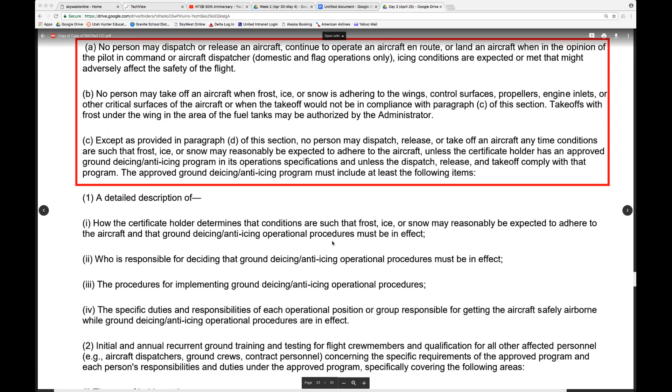So the big thing to remember from this 121.629, just as a refresher, is icing conditions. So we're not allowed to dispatch into severe, whether known or forecasted icing, right? And did he go over what icing is so you guys have an understanding of what that is when we say icing? Yes, no? He said literally any type of ice accumulations on the wing or any part of the aircraft.

Yeah, so just for an example, today I got to jump seat into Aspen, Colorado. This is one of our, we call them SAT-4 airports. And it was raining in Salt Lake today. Now, in Salt Lake, it's been off and on, bad weather, good weather, bad weather.

But what we consider icing conditions is when it's less than 10 degrees Celsius, and I'd like you guys to write this down. It's 10 degrees Celsius or less, and there's visible moisture, whether that be precipitation, mist, fog, clouds, any of that. And so today, as we were taxiing out to the runway, it was 2 degrees outside and it was raining, so we had to de-ice.

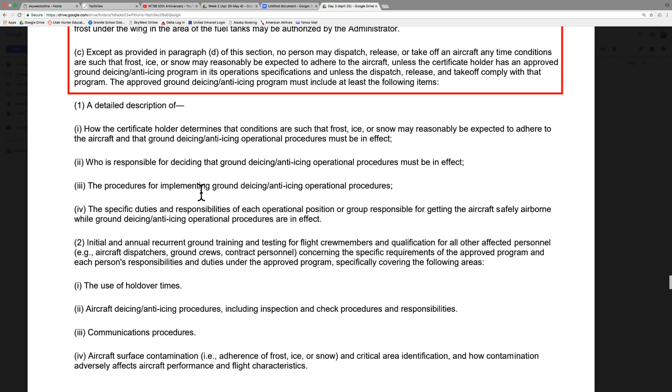So here's a description of what they're talking about here. So how the certificate holder determines that icing conditions such as frost, ice, snow may reasonably be expected to adhere to the aircraft, and that ground de-icing, anti-icing operational procedures must be in effect. Who is responsible for deciding the ground de-icing, anti-icing operational procedures must be in effect? And then the procedures. So basically, it's just saying we have to have a game plan for anti-icing or de-icing.

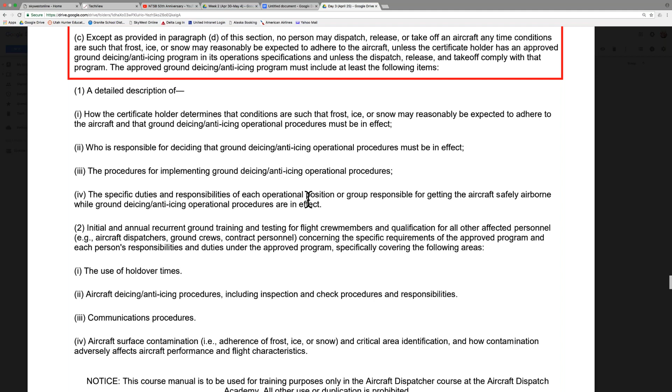So yeah, that's pretty much the gist of this detailed description. We just have to have published somewhere how we handle this. Now, when it talks about the use of holdover times here, holdover times, there's different types of anti-icing fluid. We have a type 1, type 2, type 3, and type 4, and they each have what we call a holdover time.

And what that is saying is, after the airplane has been de-iced, had that liquid sprayed on it, how long can they remain on the ground before takeoff? So if they haven't taken off within that holdover time, then they have to go through the de-icing again.

And to give you an idea of why that's important, de-ice fluid can cost anywhere from, I want to say, $22 a gallon to $50 a gallon. And you saw how quickly those machines were spraying out that de-icing fluid. It's pretty crazy how quick those charges can rack up. So we need to know our holdover times, and we need to make sure that we're staying within those times.

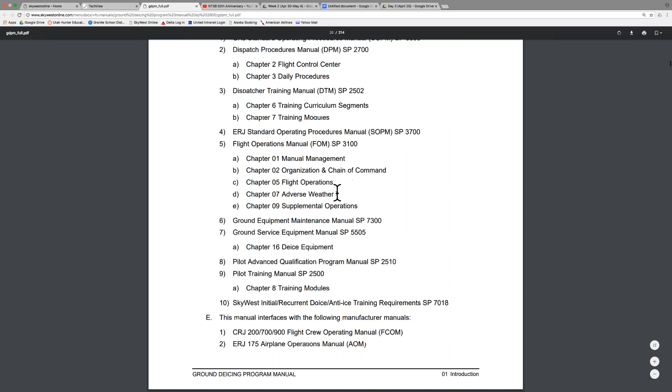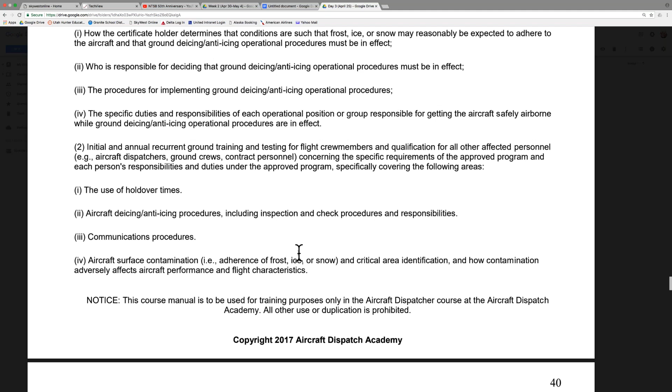So the pilots will actually reference these de-ice cards whenever they have to go through the de-icing process. And this is what I was talking about when I said pre-takeoff contamination check. That's where the first officer will actually walk back, look out both the left and right side of the aircraft, and make sure there's no snow or ice adhering to the wings, and then he'll walk back up and they'll take off.

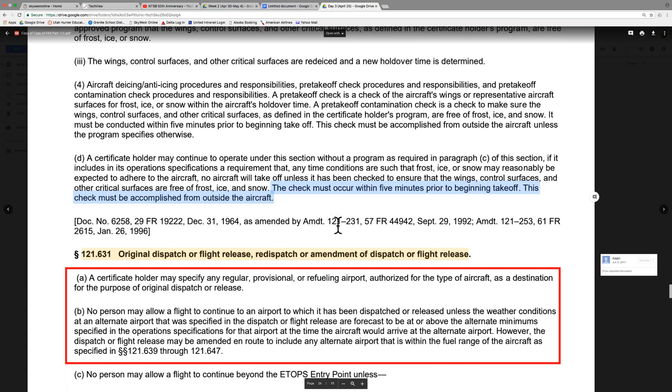And referring to that, this is why it's important that the first officer go back and check, because this FAR states that the check must occur within 5 minutes prior to beginning takeoff. So we have an exemption where they can actually look outside the windows. They don't have to walk outside of the aircraft. All right. Any questions about icing? All right, so we'll continue on.

So this is talking about our dispatch release. Now, I showed you guys what the dispatch release looks like. Just a document with a whole bunch of gibberish on it right now, but it'll start to make sense, some of the information that's contained on it. So this is talking about how the dispatch release is required to list basically any airport it's intended to land at. That's kind of basic knowledge, right? If we have a destination, we list our city pairs, like Salt Lake to Aspen, and then we'd list an alternate if we had an alternate.

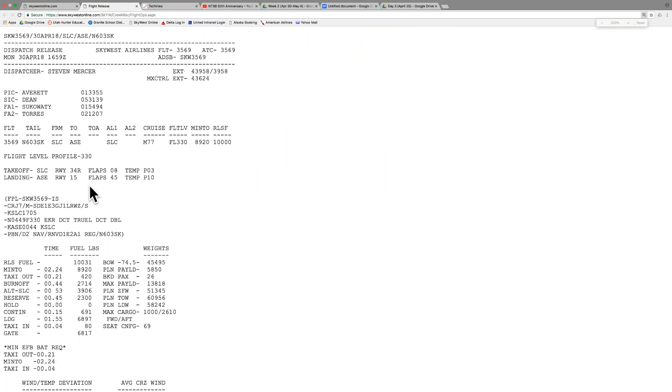I'm still not tracking. So when you say send it to him, you're just talking about send him the numbers. You're not actually sending him the fuel. Correct. We're just telling him. You're not literally sending him. Right. So on our release, let me pull up a release really quick. No, I get it. You're just changing what the actual fuel numbers are going to be, as opposed to sending him fuel. I was just confused by the word send. Yeah. So let me show you guys to help you get a visual here.

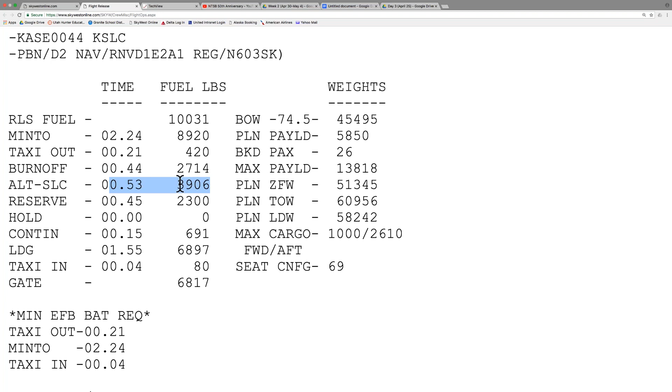So this is what he's expected to use, right? He's expected to burn 44 minutes of fuel or 2,700 pounds of fuel. So let's say that this number right here is blank. So in the event that all of a sudden he requires an alternate, and we tell him, hey, your alternate is now Salt Lake, the weather here at Aspen fell below minimums, and you need an alternate now. We would send him this information, the fuel burn in minutes and pounds that would take to get to the alternate.

We would just tell him, hey, your alternate burn back to Salt Lake is 3,906 pounds. And he would go, okay. So at that point, he could make the decision to continue on to the destination, or if it's not safe for him to continue, he'll ask for a diversion airport, and we can send him the information of how to get to another diversion airport. But typically your alternate in that scenario isn't going to be the original origin airport like it is here. So your burn to your alternate airport is probably going to be 15 to 20 minutes, so we would send him that information.

Does that make sense? We're just sending him the information so that he knows, let's say he shoots an approach. It's not safe to land. It's below minimums to the point where he can't actually land. At that point, he's going to look at his fuel and he's going to say, look, we've only got 2,000 pounds of fuel left on board, and it's going to take us 20 minutes to get to our alternate. We need to bug out and get to our alternate. Does that make sense?

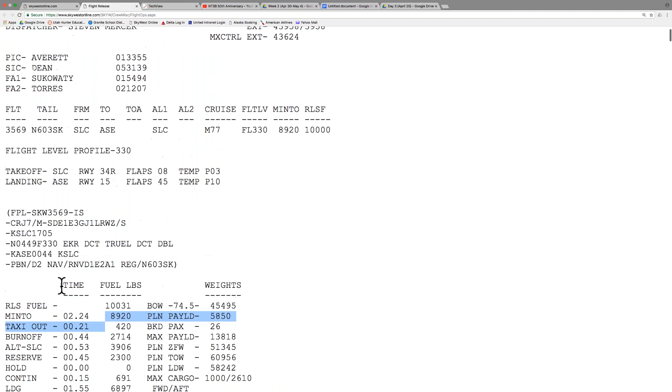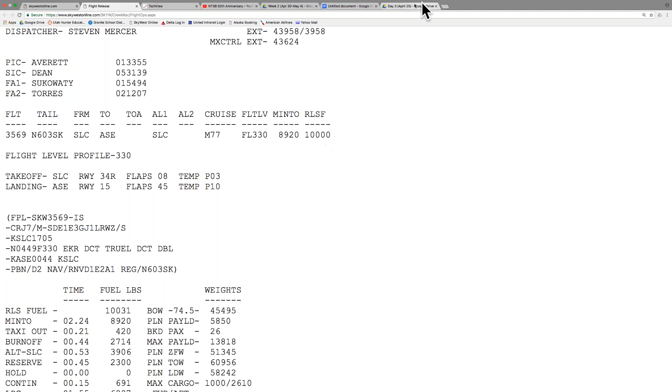Gary, is a provisional airport added into the release somewhere? Yeah, so you would actually see on the release, a provisional airport listed in this section. This is our air traffic control strip, so we would actually see an airport listed there. This is our alternate in this particular release, but then you would also see a provisional or refueling airport, it would say like fuel or something, and then it would tell us what airport we intend to land at. It's very, very rare that we ever do this. I've only actually seen it done once. But it's not completely infrequent. It has to be listed on the release, and we have to have our fuel numbers to that airport and then from that airport to the next airport.

Any other questions about that?

All right, so this is talking about unlisted or alternate airports. So when we actually do use an alternate airport, what happens is we try to get that airplane back off the ground and in the air, going to the original or intended destination as quickly as possible. We call that a diversion recovery. But there are times where an emergency is declared.

Do you guys remember how I said any airport we intend to land at has to be listed in the operation specifications, in a section we call the C70? Does everybody remember that? Yeah, so we have to actually have data and we have to be authorized to land at airports. But there are times where we have emergency landings where they have to just get down on the ground, and they'll choose any airport. This is talking about those situations.

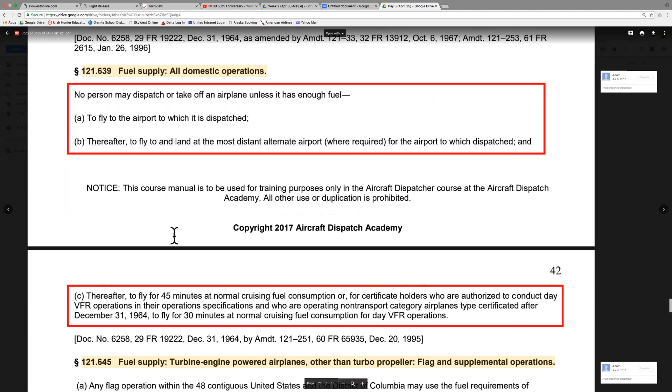So this is a very important part. When we talk about fuel supply, this is something you guys need to write down and memorize. This is one of those ones you want to memorize as close to word for word as possible.

So when you're asked, what is the required fuel supply for an aircraft? Your response needs to be: to fly to the airport to which it is dispatched, thereafter to fly and land at the most distant alternate airport for the airport to which it's dispatched, thereafter to fly for 45 minutes at normal cruising consumption. That's what you guys need to memorize, basically everything highlighted in blue here.

Does everybody have it? I'll wait for everybody to let me know they've got it.

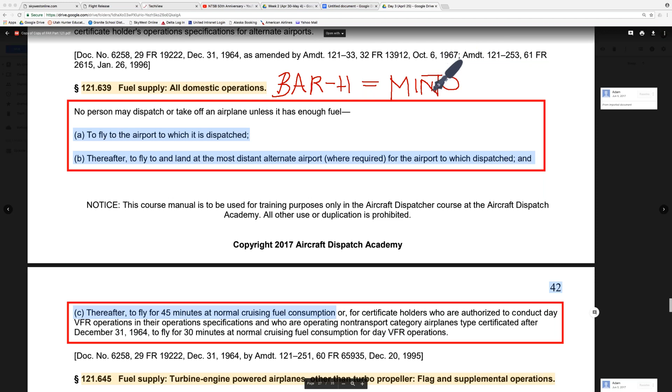Now, that being said, with the BAR-H, this equals Minto fuel. Okay, Minto fuel. Bless you. Okay, so you can see here we have Minto fuel here.

Now, what numbers comprise Minto fuel? Your burn off, your alternate, your reserve, hold, and in SkyWest, this contingency is not part of Minto. It's not required to be on board the aircraft. The captain actually can refuse this contingency fuel. But Minto is comprised of those four fuels: the burn, alternate, reserve, and hold.

And to confirm that, we can quickly add these numbers up and just make sure: 2714, 3906, 2300, 8920, and there you go.

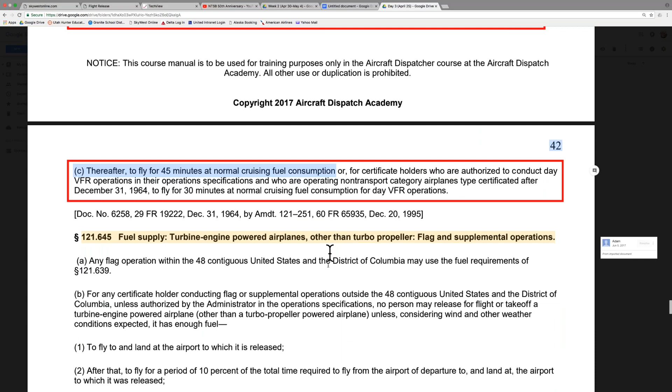Super, super, super important. So the hold refers to - and we're going to get into that down here when we talk about the factors for computing fuel.

But hold fuel is when we anticipate traffic delays or weather-related delays at the destination airport. So let's say that each airport has what we call an arrival demand chart, and it tells us how many airplanes air traffic control can physically land at the airport before they're at capacity. So as many as they can get in as quickly as they can while maintaining all the spacing requirements and all the safety requirements.

So let's say that they are 30 planes over that arrival demand. There's 30 more planes than they can physically take at the airport. In that case, we would add hold fuel because we expect air traffic control to put them in what we call a holding pattern.

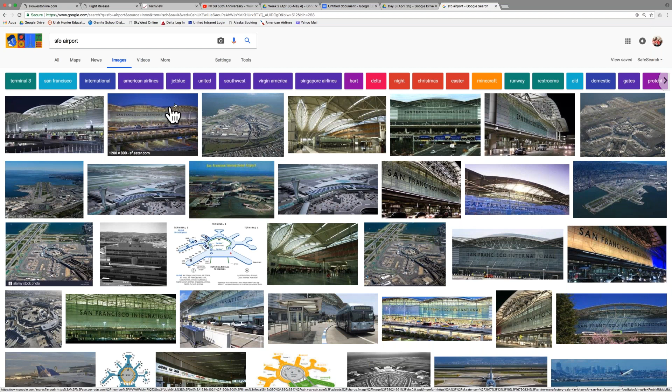I like how you mentioned San Francisco - I was just at San Francisco Airport this last weekend. Now let's see. Have very many of you ever flown into San Francisco or seen San Francisco Airport? Yes. So San Mateo is down here to the south, this is looking south. But let's see, we'll zoom in here as much as we can.

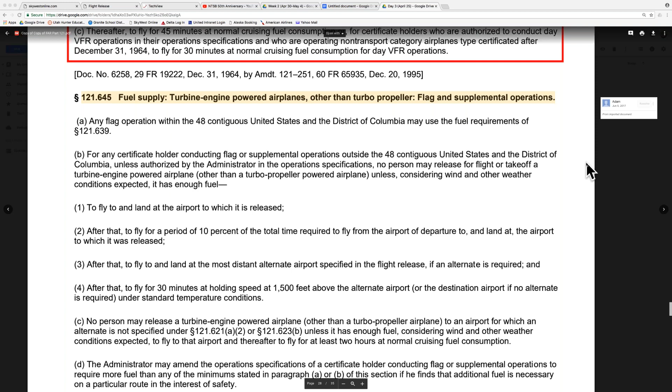So, this next section, we talk about flag operations here. This one's really confusing. Like I said, we don't tend to operate flag operations, so I'm just going to run through this really quick. There's just slight differences in the way they require fuel.

So once again, we're going to require fuel to land at the airport to which it's released. So land at the destination. After that, we're going to add 10% of the total time required to fly to the destination. So we're going to take the burn, multiply it by 10%, and then after that, we're going to add the fuel required to go to the furthest alternate, and then 30 minutes rather than 45, and rather than being at normal cruise, we're going to hold 1,500 feet above the alternate airport.

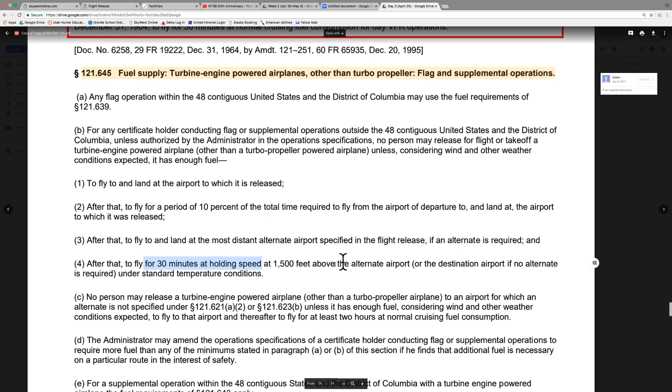So that's the big difference. It's burn times 10%, then to the alternate, and 30 minutes of holding at 1,500 feet above the alternate airport. So this one, you guys don't really need to memorize. I doubt you'll ever get asked this question in an interview or even on the practical. I know you won't get asked on the practical, but it is in the ADX.

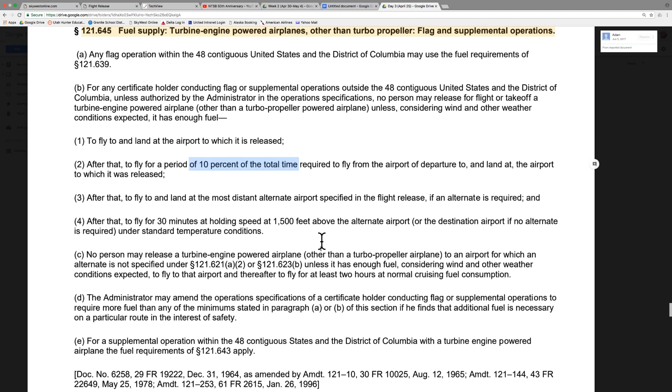But yeah, just remember flag operations. The key to remember is the 10% on top of your burn, and then 30 minutes rather than 45. So those are the two big takeaways that I think they ever ask any questions about.

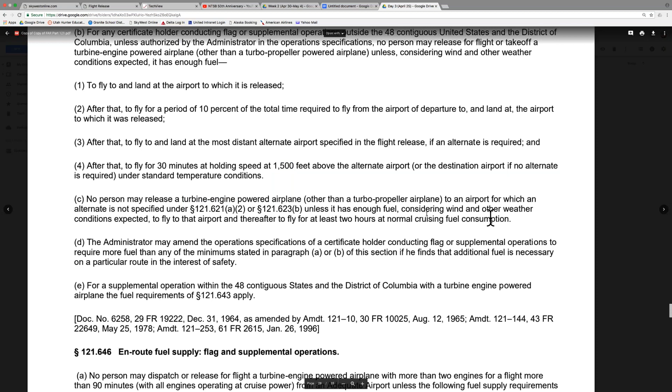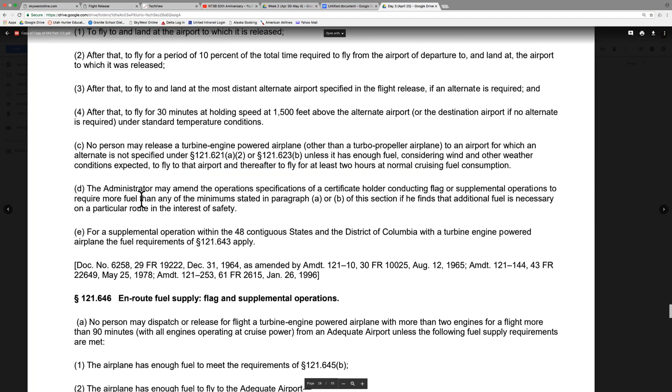Now, if it was a turbine engine, which we don't fly anymore, it would be to fly to the airport and then thereafter fly 2 hours at normal cruising fuel consumption. So again, nothing we need to worry about. And that's pretty much it.

This is talking about en route fuel supply for flag and supplemental. Again, nothing to really write down or take note of, but no person may dispatch or release a flight for a turbine-powered airplane with more than 2 engines for a flight more than 90 minutes from an adequate airport unless the following fuel supply requirements are met.

The airplane has enough fuel to meet the requirements. Duh. The airplane has enough fuel to fly to the adequate airport, assuming that there's rapid decompression at the most critical point. So basically at the top of climb, really.

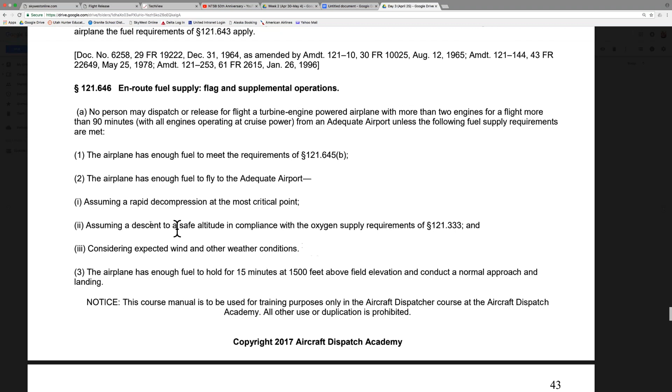And this is all assuming that there's a descent to a safe altitude with compliance to the oxygen supply requirements and considering expected wind and other conditions. So once again, not a whole lot that we need to relieve and take from this paragraph, if anything at all.

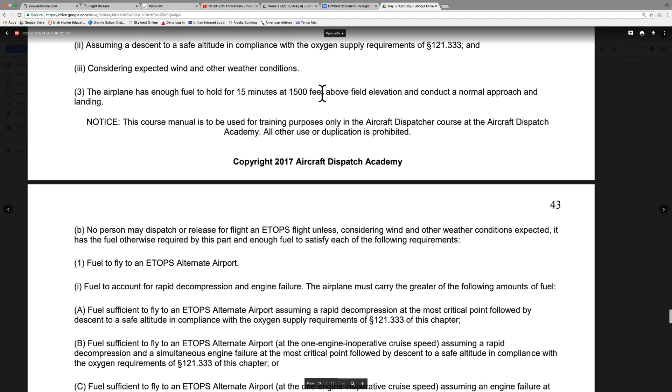The other requirement is that we have enough to hold for 15 minutes at 1,500 feet above the elevation and conduct a normal approach and landing. Then going through ETOPS, we're just not even going to waste time on any of that.

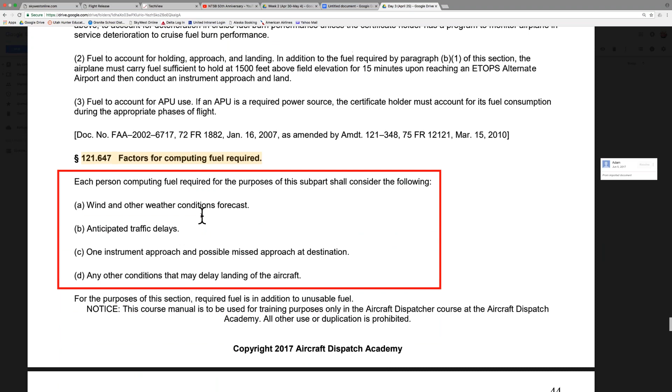Now, this is just something that's kind of standard across the board. Fuel to account for APUs. If an APU is a required power source, the certificate holder must account for its fuel consumption during the appropriate phases of flight. So an APU is an auxiliary power unit. You have two main power units. We call those integrated drive generators, or IDGs. And if one of those fails, then we have to run the auxiliary power unit, or the APU, in place of the secondary generator.

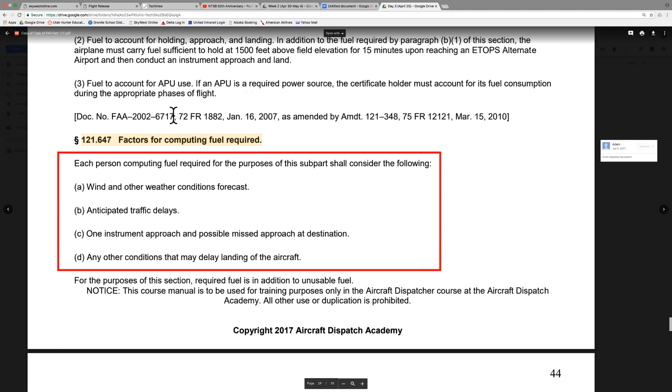When that happens, the fuel that's required to run the APU, we have to account for in the burn. So nothing to really take note of right now with that, but that's just kind of a statement that will come into play at a later time for our fuel planning, and we'll actually tell you how much fuel that is.

So this next section, though, is another one that has to be memorized, and I've got another acronym for you guys to help you memorize it. So each person computing fuel. So this is how we figure out how much fuel to put on the airplane. I mean, we know that we have to have burn off, alternate, and reserve. But how much do we know to compute for the reserve or the hold or those other types of fuel?

So when we're computing our fuel, we're going to consider these four following things: wind and other weather conditions forecast, anticipated traffic delays, one instrument approach and possible missed approach at the destination, and then any other condition that may delay the landing of the aircraft.

So, us dispatchers love to hear pilots call in and cry. So the way we remember this one is they always call in to cry about fuel. So this is how we remember our factors for computing fuel. The W, so it's WAH. Wind and other weather, anticipated traffic delays, an instrument approach and possible missed approach, and then any other conditions that may delay the landing of the aircraft.

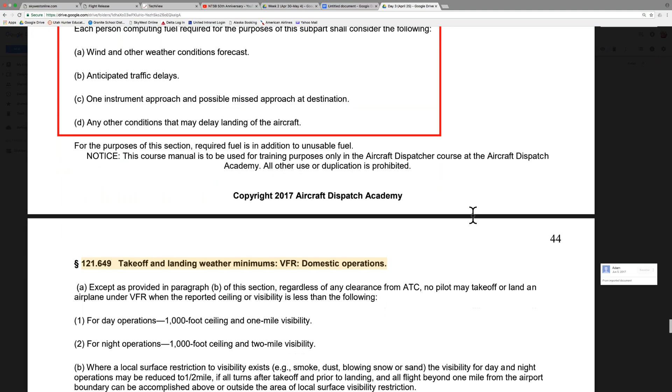So I've talked a lot about landing minimums, weather landing minimums. This is talking about VFR. So this is something that doesn't necessarily apply to us, and it's nothing that we base our minimums off of. But this is telling us that no pilot may take off or land an airplane under VFR when the reported ceiling or visibility are less than the following. So for day operations, 1,000 foot ceiling, 1 mile visibility, and for night, we just double the visibility to 2 miles.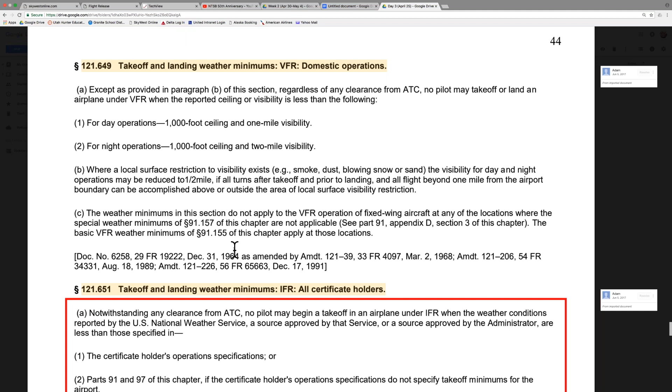Now this includes things like smoke, dust, blowing sand. And in those cases, we reduce our visibility to 1/2 mile. VFR, we don't really apply to VFR. We always plan for IFR. But that's just kind of a gee golly for you guys.

Now, this is talking about IFR, but this is just talking about the standard, for anybody out there that has a 121. Now, remember, we can have what we call exemptions in our operations specifications that allow us to operate outside these restrictions.

But this just says, notwithstanding any clearance from air traffic control, no pilot may begin a takeoff in an airplane under IFR when the weather conditions reported by the NWS or a source approved by that service or a source approved by the administrator are less than those specified in the certificate holder's operations specifications or parts 91 and 97.

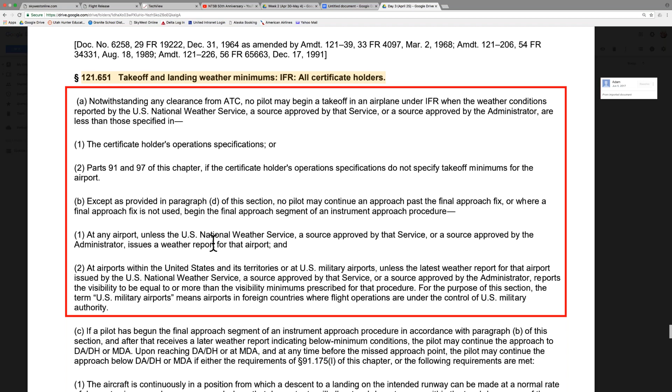If the certificate holder's operations specifications do not specify takeoff minimums for the airport, or except as provided in paragraph D of this section, no pilot may continue an approach past the final approach fix, or where a final approach fix is not used, begin the final approach segment of an instrument approach procedure. So, what in the crap does that mean? Let's see. Let's take a look at one of these so-called charts.

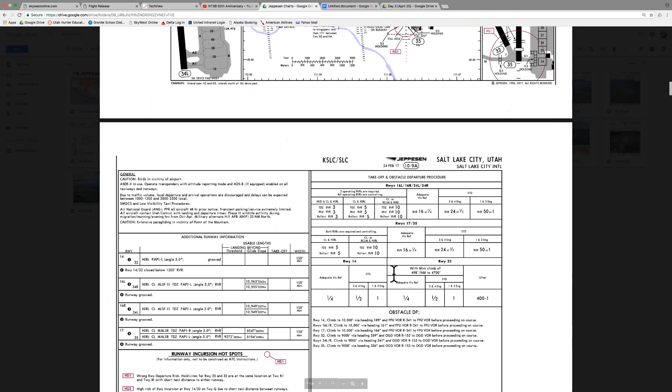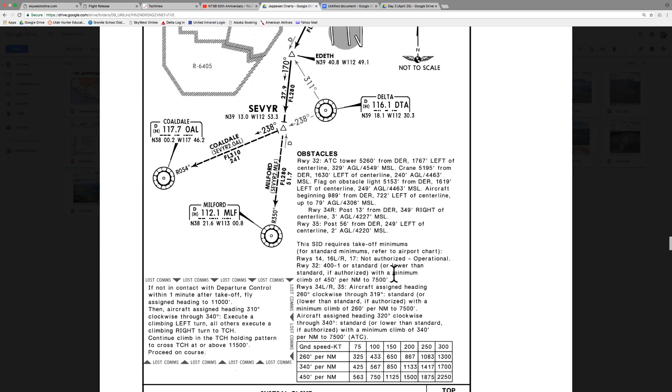So let's look at Salt Lake City here. Now, we call these JEP charts, and we'll get into the nitty-gritty about these. But it's talking about weather minimums. Each approach has weather minimums. Now in VFR we talked about ceiling and visibility. Well, in IFR we also will apply those ceilings and visibilities, but our ceilings and visibilities go down much lower than they do for VFR. Remember, VFR stands for Visual Flight Rules. And IFR stands for Instrument Flight Rules.

So what this FAR is talking about is we have what we call landing minimums right here. This is saying that the cloud layer, now who remembers what a ceiling is? Who can tell me what a ceiling is? Basically, the bottom of the clouds above the ground. Okay. More specifically, though, it's the lowest layer defined as broken or overcast clouds or vertical visibility. And that's a definition we went over a while ago, but yeah, the bottom of the clouds, so that lowest layer, the bottom of those clouds, can be 200 feet off the ground. So the pilot has to break through those clouds 200 feet above the end of the runway.

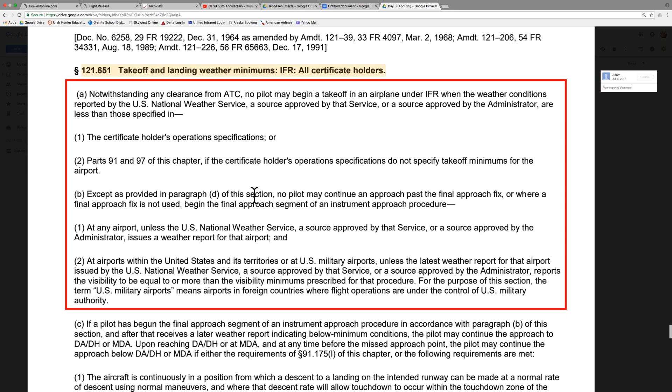It seems to me, Garrett, that as I was studying through the Sheppard Air preparation, that there are certain questions on the ADX that said if a pilot has less than 100 hours in an aircraft, that those minimums are increased. Yeah, exactly. So I don't know if Adam covered that part. Let me take a quick look over my notes to see if that's something that we cover here in the next couple seconds. Okay, yeah, we'll cover that here in just 1 second. It's actually the next section here. But yeah, we'll hit that in just 1 second.

So basically, this just tells us the weather sources that are approved for use for those minimums. So we'd have to use either the NWS or a source approved by the FAA. Like I've mentioned before, we use WSI at SkyWest, but we'd have to use one of those sources, and we can use the least penalizing source too.

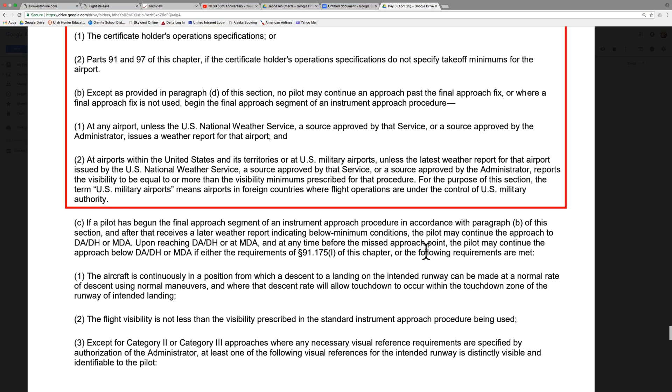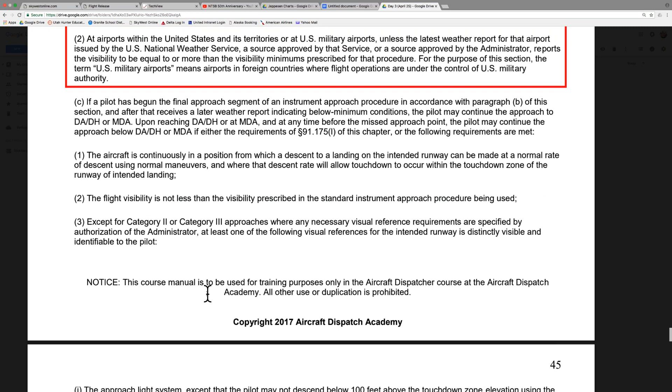Let's say the NWS is reporting 1 mile visibility, but WSI is reporting half-mile visibility. We can use the less restrictive of the two. So we could use the 1 mile in that instance to tell the pilot that he has landing minimums. The important thing to know is that what the pilot actually has reported to him as he's starting that approach, that's the information he has to go off of.

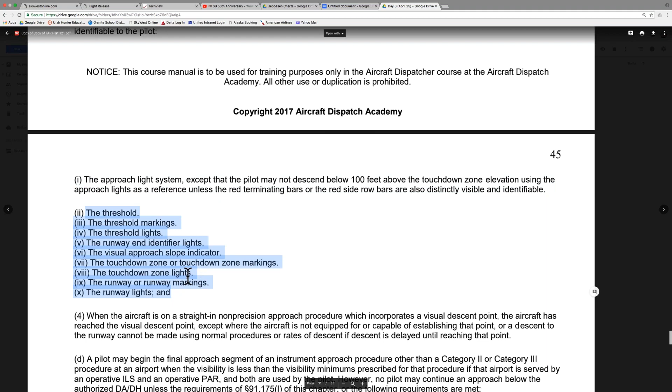So the approach light system is what he has to see. And this is a list of things that are acceptable as the lighting that he can see. So if he can see any of this lighting, then he can continue his approach to the runway when he breaks out over the touchdown zone.

We'll talk about Category 2 landings a little bit later. I don't want to confuse you guys right now, but basically there's lower minimums we can use, but in this class we will only use Cat 1 minimums, which would be that 200-1/2 here for that approach.

Okay, now let's jump into what Rex was just talking about, what we call a high minimums captain. So if the pilot in command of an airplane has not served 100 hours as pilot in command in operations under this part and the type of airplane he is operating, the minimum descent altitude or decision altitude/decision height and visibility landing minimums in the certificate holder's operation specifications for regular, provisional, or refueling airports are increased by 100 feet and 1/2 mile. So that's it. That's all I want you guys to take away from this.

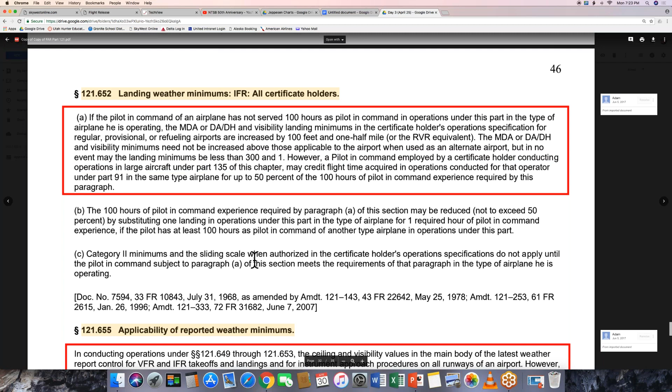Is everybody good with that? That's pretty much all that we need to take away from this. 100-1/2, 300-1. All right. And that's something that you can apply to the ADX when you take it as well. Just any question that deals with the high minimums captain, just know that you have to add 100 and 1/2 and that their minimums can never be lower than 300 and 1.

All right. In conducting operations, the ceiling and visibility values in the main body of the latest weather report control for VFR and IFR takeoffs and landings, and for instrument approach procedures, on all runways of an airport.

However, if the latest report, including an oral report from the control tower, contains visibility values specified as runway visibility or runway visual range for a particular runway of an airport, that specified value controls VFR and IFR landings and takeoffs and straight in instrument approaches for that runway.

So all this is saying is that we have to have the ceiling and visibility values in the main body of the latest weather report. And we'll talk more about this when we talk about that legal to go, like those little worksheets that I have in there. But yeah, so this is just telling us that our latest weather report is the controlling report, whether it's a textual report or from the control tower. That's the one that's controlling.

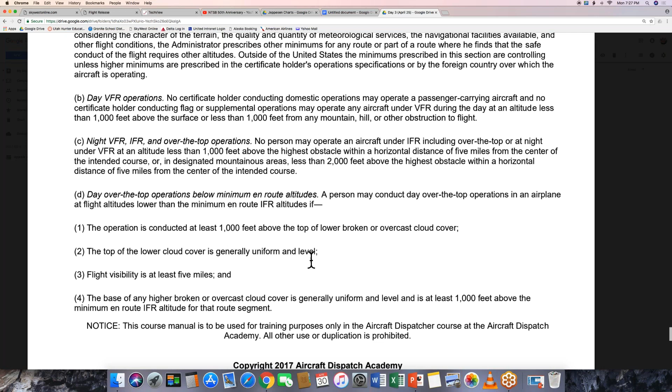And as dispatchers, we don't plan for clouds. The only clouds that we plan for are broken and overcast or vertical visibility above the airport that we intend to land at. That's all we care about when it comes to clouds. Anything en route, we just don't care about as a dispatcher because that's the pilot's job. And we don't know where every cloud's going to be in the sky.

So, responsibility for dispatch release. Each certificate holder conducting domestic or flag operations shall prepare a dispatch release for each flight between specified points based on information furnished by an authorized aircraft dispatcher. The pilot in command and authorized aircraft dispatcher shall sign the release only if they believe that the flight may or can be made with safety.

The aircraft dispatcher may delegate authority to sign the release for a particular flight, but he may not delegate his authority to dispatch. So what this is talking about is everything's done electronically, and we do electronic signatures now, but there's times when the system may go down or we may have issues getting them a particular release. Now, in the event that that happens, we can still have the pilot sign the release on our behalf,

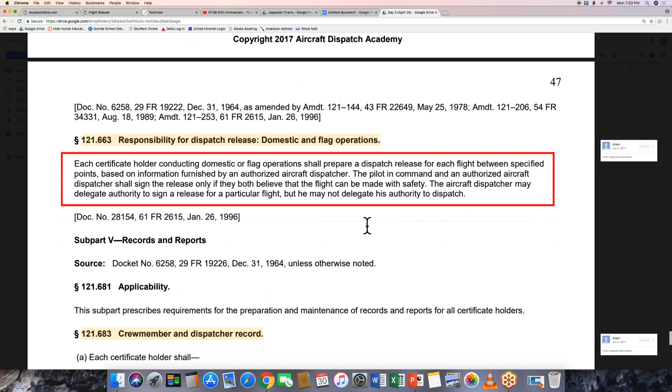Adam, if you're there, you can chime in. In reading 121.663, it does say that the pilot in command and an authorized aircraft dispatcher shall sign. So it doesn't say anybody else there. And I'm pretty sure that's what it is, the pilot in command, because he's the one that's basically backing up our decision to execute the flight. And you did say that if it's recorded verbally, he can sign.

Yeah. So Adam, we're talking about this responsibility for the dispatch release. We're talking about the authority to sign, delegating the authority to sign. Is it only the PIC? I'm pretty sure it's only the PIC that's allowed to sign in that instance. Is that correct?

He doesn't have a mic right now, sorry.

There you go. Yeah, so the PIC has to actually sign it. The dispatcher can delegate his authority to sign it to the PIC. So there you go.

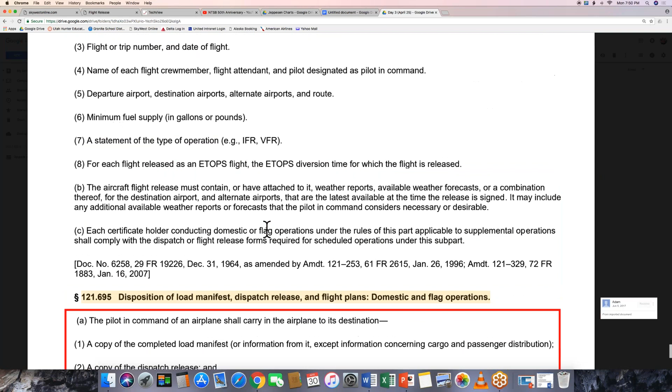All right. Now, this is talking about a flight release. So, like I told you guys before, a flight release is basically a dispatch release, but for supplemental operations. And this is something that we will assist the pilots with at SkyWest, but not required by the dispatcher. This is something that technically the pilot is responsible for as a flight release. But it's very similar to dispatch release. But I'm not going to confuse you guys. It's not necessary to know this part, so I'm not going to confuse it with what we just learned. But there are slight differences.

This is talking about what the pilot has to have aboard the aircraft when flying to the destination. In the event that an FAA examiner is aboard the aircraft, or decides to come aboard at any point, these are the things the pilot has to have in his possession. So what you guys need to memorize is the three things a pilot has to have to the destination: the load manifest, the dispatch release, and a copy of the flight plan.

Those are the three things. I don't have any fun acronyms for this. Maybe DLC - dispatch, I don't know if anybody's a gamer. DLC: dispatch release, load manifest, and copy of the flight plan. Maybe that's how I'll remember it. That's my acronym for it. I just created that on the spot, never used it before.

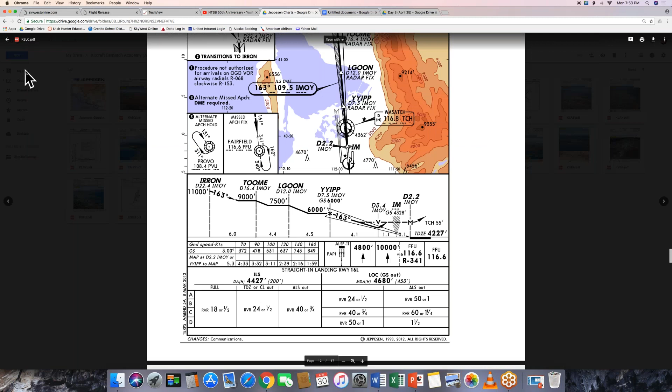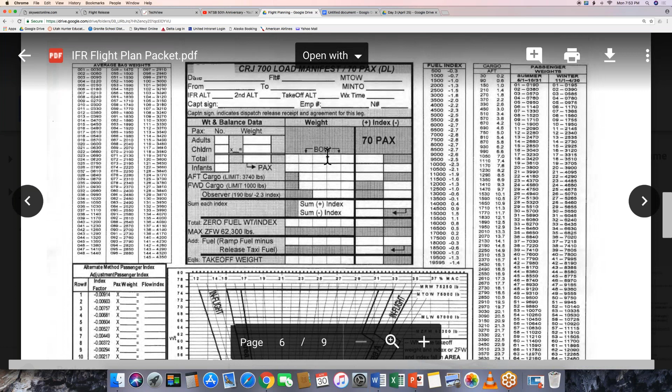This is our performance worksheet, this is runway data, and this is the load manifest, what we call a weight and balance form. What they need to know is how many adults are on board, how many children are on board, and what is the total weight.

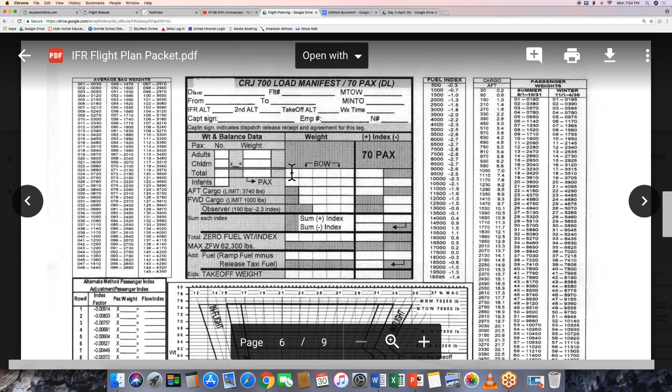We call that payload - how much is that all going to weigh? This bow weight is the basic operating weight, which we went over in the release. That's just the aircraft and everything required to operate it: the crew, the oil, all of those necessities - the seat belts and oxygen masks the flight attendants use at the beginning of every flight. All of that's included in the bow weight - required equipment on board, everything but the passengers, cargo, and fuel. That's our basic operating weight.

Then we have to figure out how much the passengers weigh - the payload - and our cargo. Then we figure out how much the fuel weighs, how much fuel they have to have on board when they depart, which is entered here - we call that release fuel. Then their total takeoff weight is what we see in this bottom box, and this will tell them this index number.

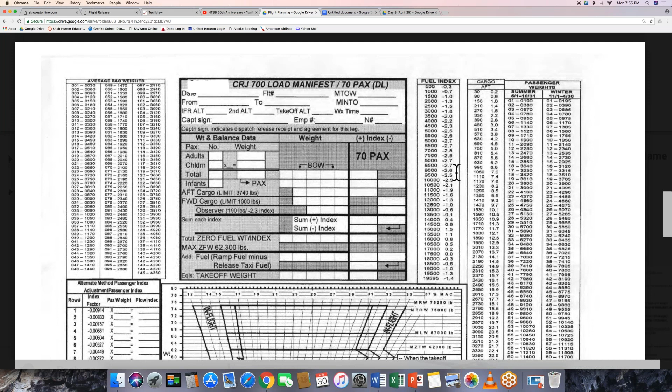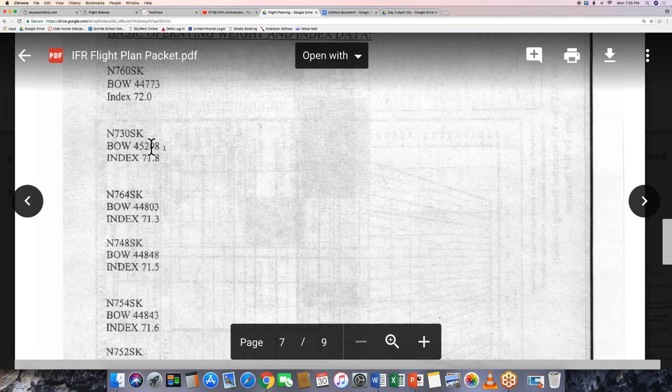We get that by pulling the data from these different sections. Also we can see the different tail numbers and their operating weights and their index - all that information's there. Then the flight attendants, on SkyWest operated flights, actually walk through the cabin and count the passengers in each section and write down the number on what we call a PIN card.

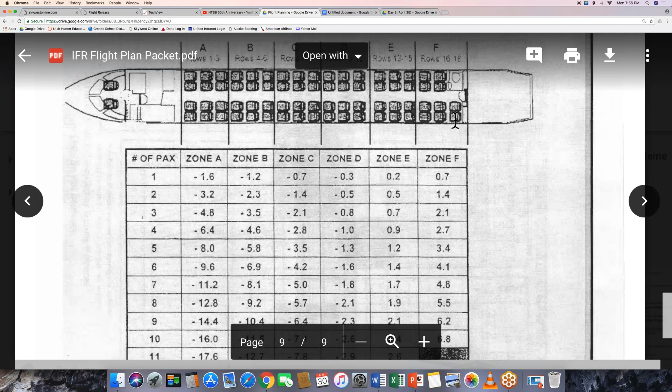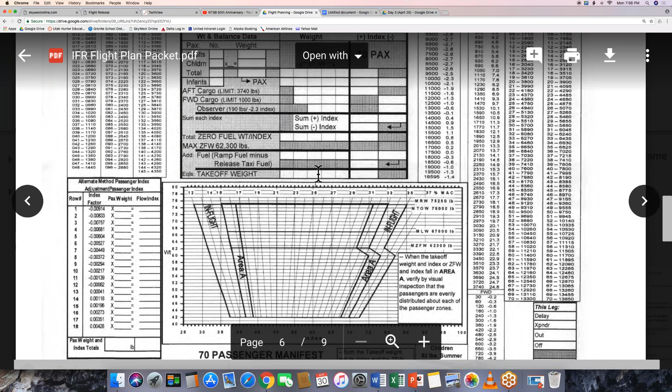And that PIN card is what they give to the captain to tell him how many people are on board. Then this is how we figure out that index, where the weight is in reference to our center of gravity. That's all we use to get these numbers on this load manifest. Then we have to make sure - this is our center of gravity table here at the bottom - we use this information from the section above to make sure the airplane is within its center of gravity limits. That's what the load manifest looks like, just making sure we're not overstressing the aircraft.

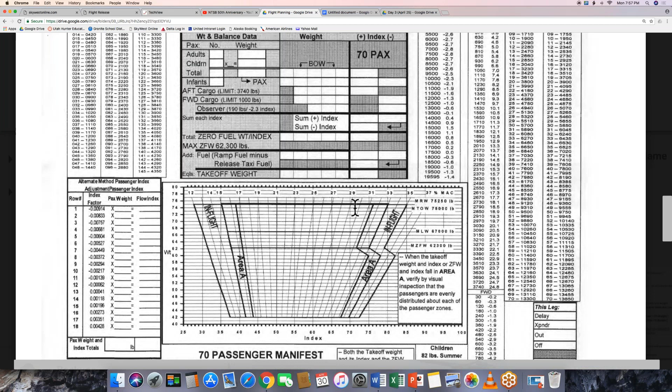And we do this for every flight.

So that is our acronym for that, DLC.

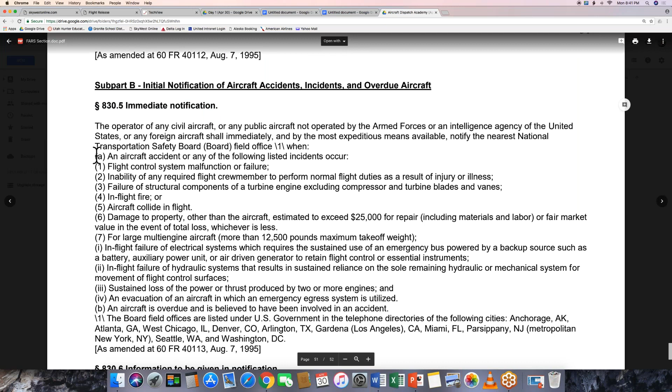So this is NTSB Part 830, and 830.2 is the definitions. This is what's going to help us understand the information below. Like I was saying before, we have this section on immediate notification. These are times when we immediately have to notify the NTSB field office: an aircraft accident or any of the following incidents occur. So we'd come up here to aircraft accident. What qualifies as an aircraft accident? You know, this.

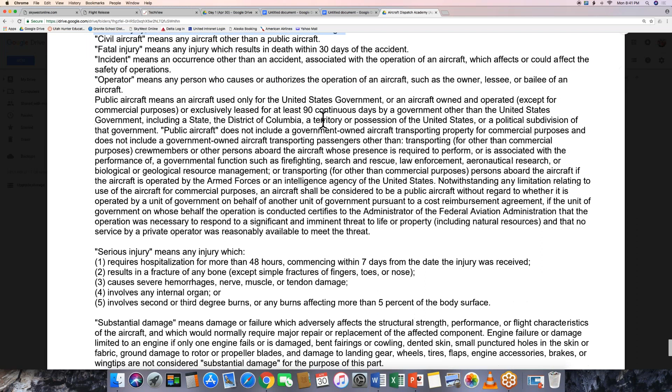So anytime you're unsure, you know that there's been damage to the aircraft, or somebody, due to something that happened on the aircraft, got injured or anything like that, this is where we would go to find out the required reporting period, basically. So,

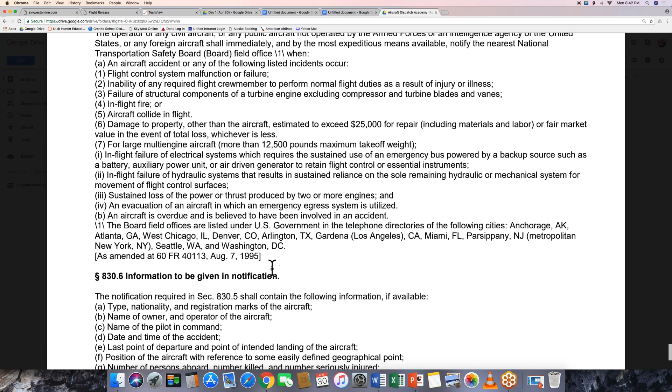sustained loss of power or thrust produced by two or more engines. So, kind of a significant thing, right? Anytime we use the emergency egress system, anything like that. This talks about the required information that needs to be given.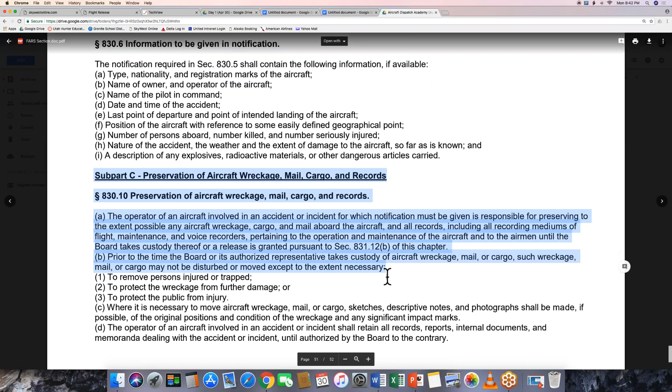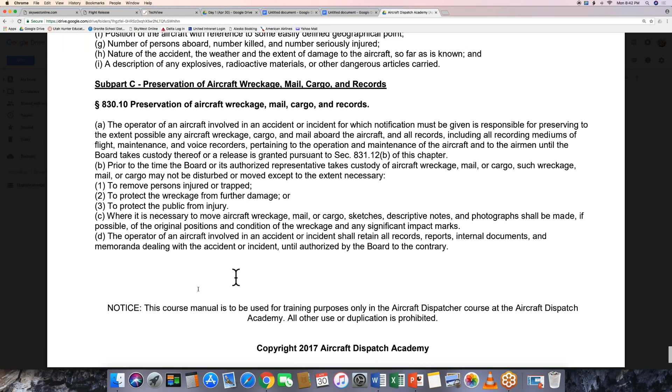This talks about the preservation, to make sure that if we ever come upon aircraft wreckage or anything of that nature, this is where we would go to know how to handle that situation, the actual physical aircraft itself. And it's really important, things like this where it talks about preservation of aircraft wreckage. It's really important to do that because they need to know how things happened.

And the displacement of one item can actually kind of interrupt their investigation or throw them off in the wrong path. So making sure that we're preserving the wreckage is important.

As far as reports and statements to be filed, SkyWest has procedures. I know that every major airline, every regional airline will have some sort of procedure written out on how to handle these situations as far as the reports to be filed, statements to be filed.

I know, for example, when we're at SkyWest and we have an aircraft accident where there's a loss of life, really anything, and if we are called by the media, we're not allowed to talk to the media, and we need to pass that phone call along to the appropriate person. So making sure that you understand the particular airline that you're working for is pretty important when it comes to these reporting and statements to be filed.

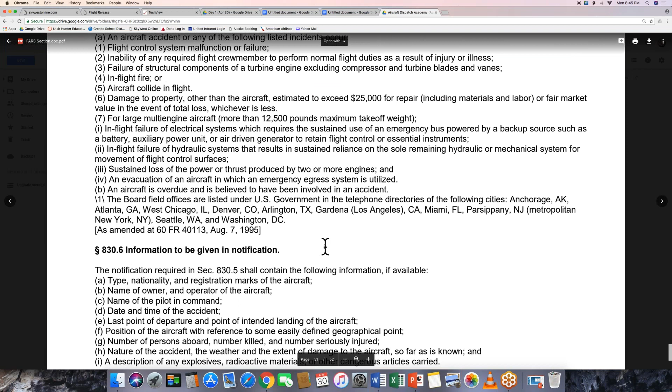But this talks about the specifics of within 10 days or after 7 days, or basically anytime there's an overdue aircraft or an accident, anything of that nature, we need to refer to this document because this is going to give us the specifics of how to deal with those situations as far as reporting to the NTSB. And that's all we ever do, is we just file a report.

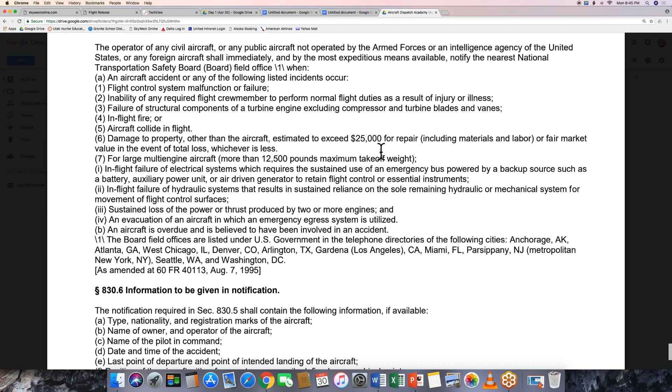And 9 times out of 10, probably 10 times out of 10, the airline that you're working for will have a procedure that they want you to follow to report those incidents. So, again, nothing that we need to spend a particular amount of time on as far as going over this 830 document, just understanding that there are reporting requirements, and this is where we find them. That's really what you guys need to take away from this, and understanding that this is where we find the definitions for NTSB related incidents.

Now that being said, to help us understand the importance of the NTSB, we are going to go over actual aircraft accidents and incidents that have happened. The video talks about these NTSB investigations that were done on aircraft accidents where there was a substantial loss of life, and the things that the NTSB implemented through the FAA to reduce the number of accidents.

Now, we're going to go over some of the crashes that were actually part of making these changes. And remember that all of these documents, if you go into your Google Drive and you go to this FAR section doc, this is where you can find all the original documentation. So this is part 65.

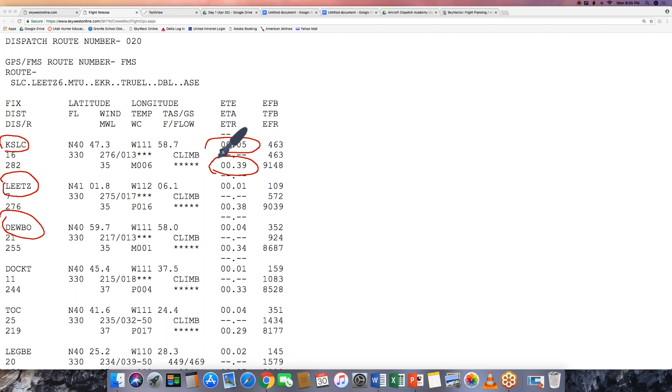But if we look here, we can see the ETA. So this is Salt Lake City, and we're going to this checkpoint, this LEETZ, or this waypoint. This is telling us how much time it's going to take us en route, and how much time we have remaining in the flight. As we go from point to point, we're using this time. And this gives us a longitude and latitude to refer to.

So time and distance. You guys remember the calculation in school? Time, rate, and distance problems.

My wife absolutely hates them. But

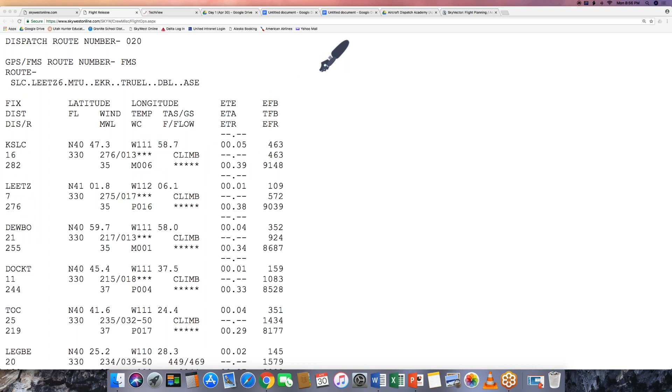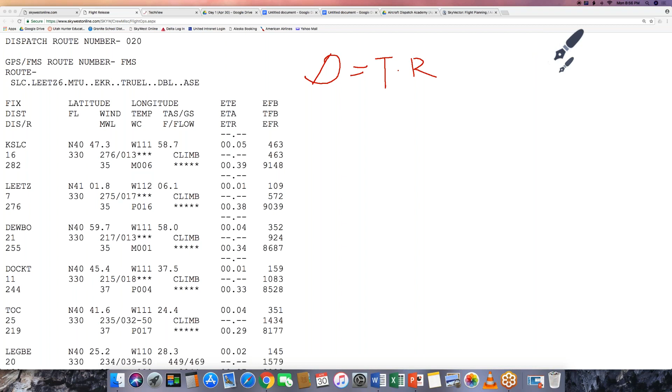What was it? Distance equals time times rate. No. Is that right? And I've already forgotten, and it's only been a couple weeks. Anyways, we're going to use that equation a lot. I sound like an idiot, but anyways, we need our time, rate, and distance. So distance equals time times rate. So, sounds wrong. Anyways, I'll have it all worked out. Have faith in me. Anyways, that's how we figure out where we're supposed to be point to point.

And back in the day, Rex, you probably remember using what we call pilotage or dead reckoning. You know, this. Yeah, that's kind of how we used to navigate, using VFR. That is how we navigate. We just plan going from here to here, plan the amount of time it takes to get there and the distance it takes, and we know how fast we're going. We know that from here in 20 minutes we're supposed to be over that point. That's what we call pilotage or dead reckoning.

A lot of times that's what the dispatcher actually plans. When we talk about St. George specifically, each airport will be treated kind of differently depending on the approach or the arrival. Each airport has an approach and arrival route that they prefer, especially bigger airports. So if the aircraft are arriving, they'll fly a certain route. If they're departing, they'll do a specific route. But then there's variations inside of those.

So say the winds or the weather, and almost always it's going to be due to wind or weather when we deviate from a normal course. But like St. George, we tend to go out on what they call the Jitka 2 arrival or Jitka 2 departure or Hivka 2 departure. Anyways, depending on the arrival or departure that they're using and the direction that they're going, they'll change the route of the aircraft.

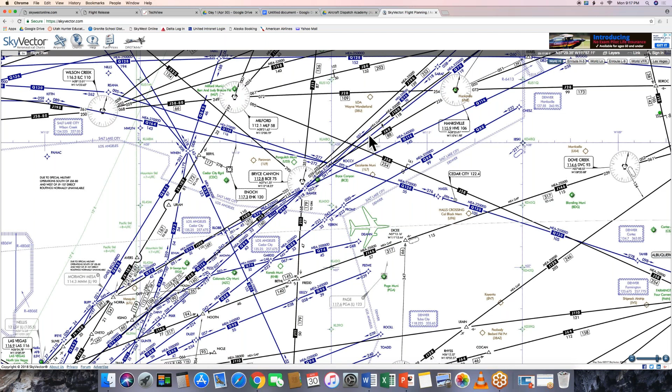So if they're going down to Phoenix, they'll spill off and kind of curve around St. George, depending on which runway as well, and come down to the south here, or they'll just fly directly out. If they're flying north up towards Salt Lake, there's times where they'll come out and then come up on this arrival into Salt Lake. If they're flying to Denver, sometimes they'll come up here and head over this way. So it just depends on where they're trying to go and the different arrival routes at the airport. It's all subject to a handful of things. It's just kind of hard to go over them all.

But as we talk about these things today, when I talk about standard terminal arrivals, we use these charts here. So the arrival charts, we'll use the JAMMN 5 when we're coming in from St. George. Let me see if I can expand this a little bit. If you remember that Milford VOR, we'll do the Hivka 2 departure, and then we'll come up and connect to this Milford VOR and then fly this into Salt Lake International.

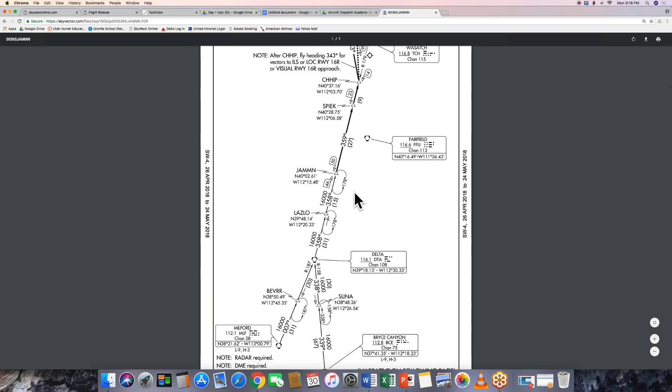But like I said, and as you can see, looking at Salt Lake International, there's lots and lots of ways to skin a cat. These standard terminal arrivals, depending on what direction you want to go, or where the weather is that you have to route around, you can choose any of these. And when you're departing, you can choose any of these. So there's lots of different reasons and lots of changes that we can take in and apply.

So I didn't really answer your question, but I answered it very politically. Clear as mud. We're going to dive into this week, but this is just an introduction to some of the stuff we're going to learn about. There's lots of different reasons why we do different things in dispatch, but we're going to learn why we do those things.